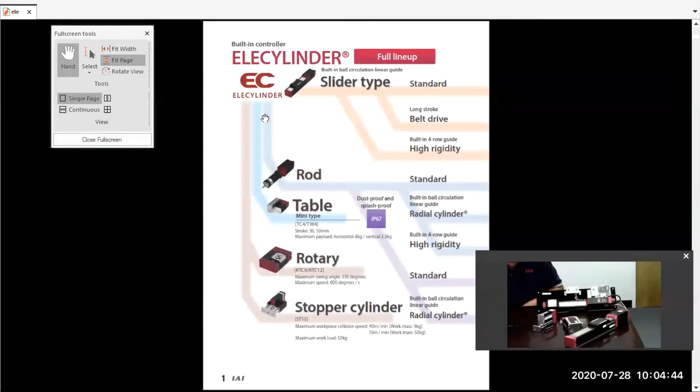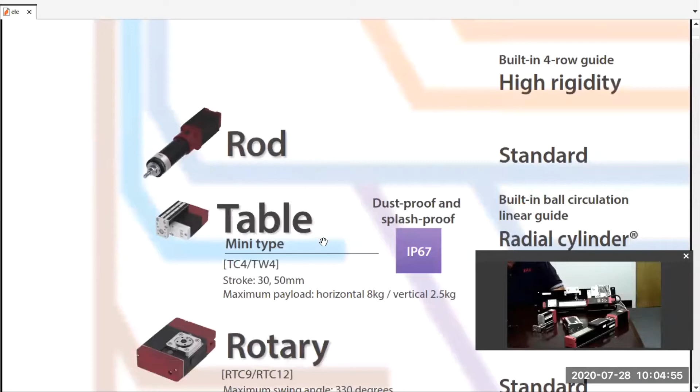We have a very broad product offering on the EleCylinder. We have the slider style, we have the rod style, we have the table mini type, and then of course we have a rotary actuator, and then we also have a stopper cylinder.

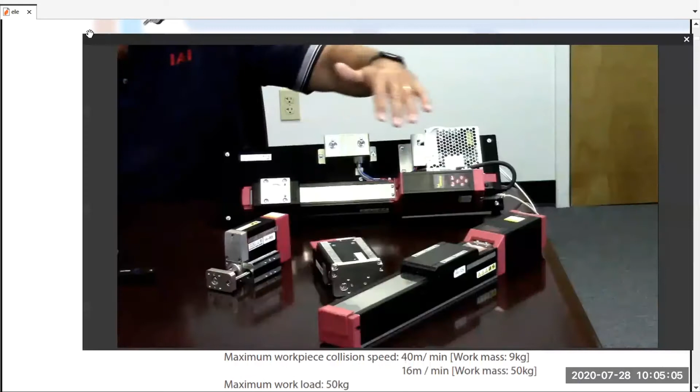You'll notice here on the table, the demo that I'm going to be working with is the slider style. Here's a couple of your stopper cylinders. Here's a table style with the rails, and then here's a larger slider style. We also have the rod style, which isn't represented here on the table.

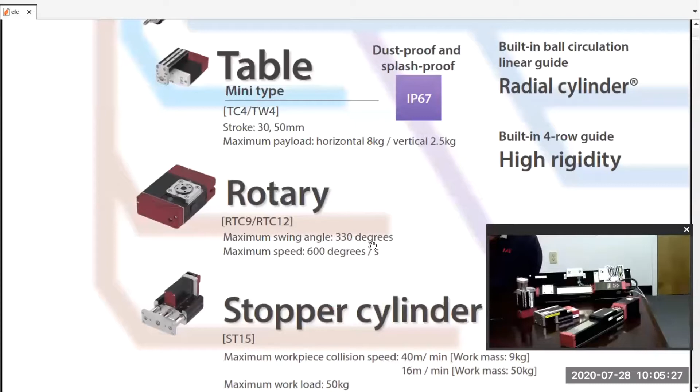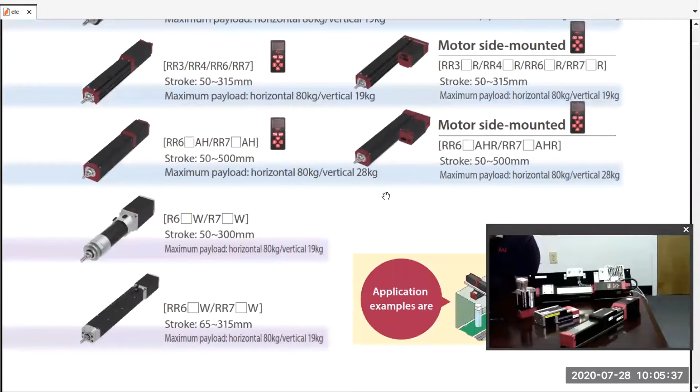This allows us, not only in the slider style but also in the rod style, to handle a side load or a radial load to the actuator. The actuators will come complete with the motor, the coupler, the ball screw, the slider. Everything is included, the controller, everything is included in the EleCylinder, even the cables.

So let's show you a little bit about the actuator here and explain a little bit about it. This demo here has, of course, the slider, the cable that comes with it. This incorporates the controller. And then what I have over here is a 24-volt power supply. These are all 24-volt devices. And then this is basically mimicking the output of our PLCs.

If I select one of the buttons, it'll retract it. If I select the other button, it'll extend it. So the simplicity of the EleCylinder is that, again, we're going after the pneumatic applications. Most pneumatic applications are extend to the end of stroke and retract back. So it's a two-position device, okay?

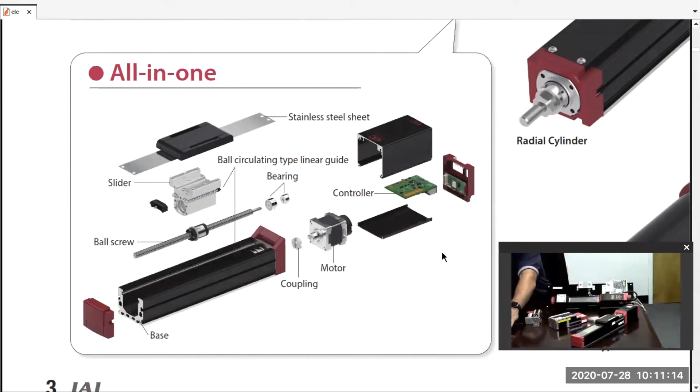With that said, let's go into it. I'm going to shrink my screen here a little bit and show you what my setup is on my EleCylinder. We have many different ways to set up the EleCylinder.

We're going to touch on the one that uses the RoboCylinder software. This is the exact same software that we've been using on the RoboCylinder for years, whether it's the rotaries or the linears, it's the exact same software. IAI is not in the business of selling software. Once you purchase the software for one application, you get it for life. So it's used across their whole realm.

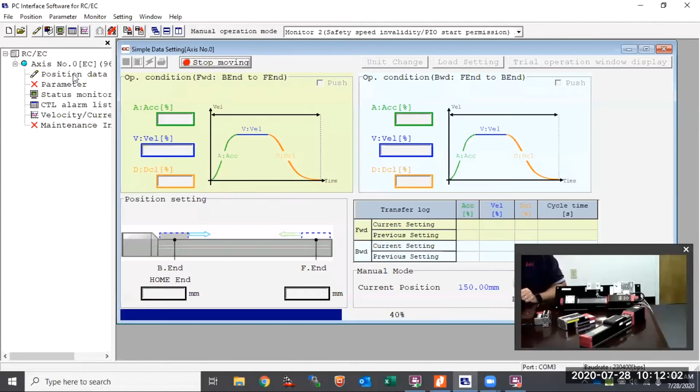So here you have your software, and I'm going to pull up our position data. If you're familiar with the RoboCylinder, you're going to look at this screen and say, geez, this is a little bit different. It is the same software, but when it's plugged into an EleCylinder, it's pulling up a slightly different application. And what we're seeing here is my extend stroke.

This is done with three variables here. I have my acceleration, I have my velocity, and I have my deceleration. With the acceleration in percentages, I have 100%, 36% of the velocity, and 100%. To change those units, if you wanted to work in different units, I click the unit change, and that takes me into G's, millimeters per second, and deceleration.

Now here we can modify these, and I'm going to come back to that. Over here we have our extend or our retract side. Exact same layout, but working on the retract stroke.

Down here, we have our position setting. This is really interesting. When you order a 12-inch stroke cylinder, unless you put an external stop, you're going to have 12 inches of stroke. On our EleCylinder, you can come in here and change this at the setup point and modify it.

This guy is a 150 millimeter stroke, and I'm going to change it so home is at 10 millimeters and extend is at 140 millimeters. Once we set that up, we click our transfer button. Oops, I have to go into teach mode so I can modify this. Once I hit my transfer button, we transfer that up. And now I'm going between 10 and 140.

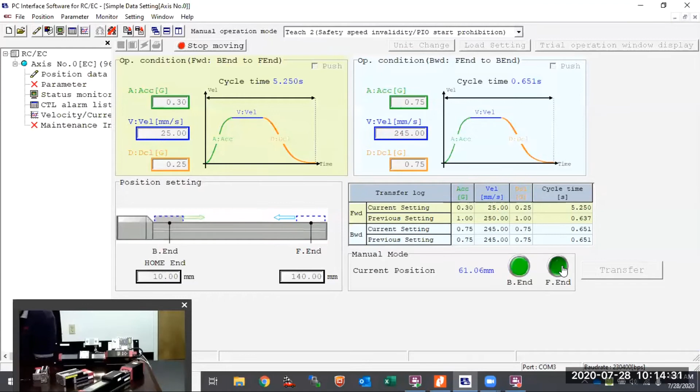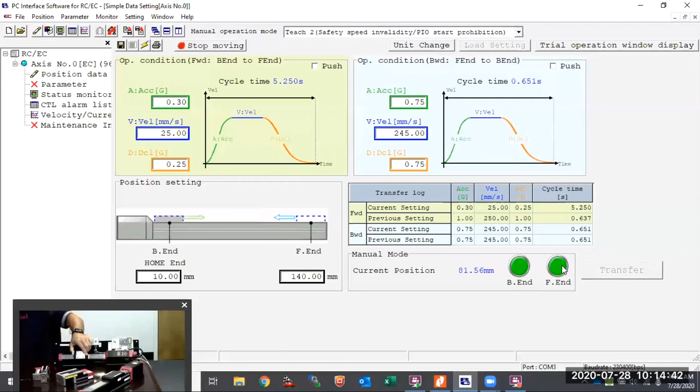If I let go of that button, just like if I dump my outputs on my solenoid for a pneumatic application, I'm going to stop right in mid-stroke. As you can see, we're holding full torque. I come back on that, and I continue on.

So you can see here that this is very simple in your layout. You're reading your position down here. You've got your buttons that are mimicking your solenoids, so you can test this out and make all the modifications you want.

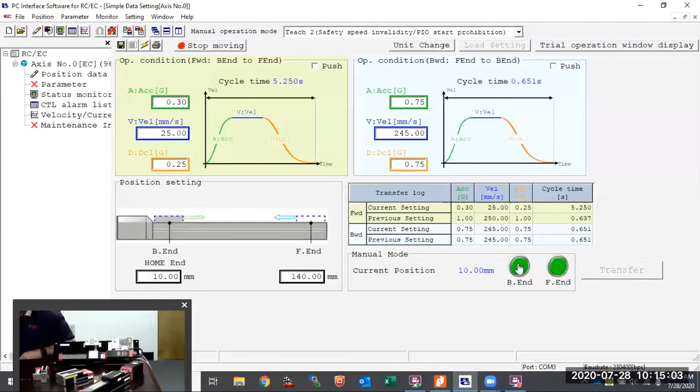Now, you can see that the software is very easy, and I mentioned we're just going to touch on them here very briefly, but there are a couple of other ways that you can program or set up, if you will, because that's certainly not programming.

This unit has actually a digital screen on it that allows you to adjust your locations, your speeds, your accelerations, all the things that I just adjusted on the software, we can do it on this screen. We can also outfit these to have Bluetooth and have an actual pendant that is set up very comparable to the software.

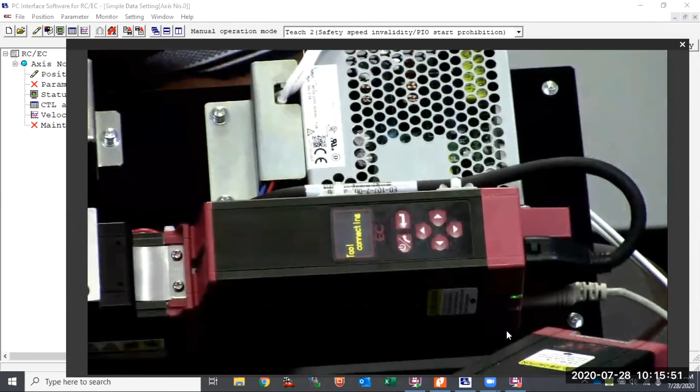And with that pendant, you can now go out and attach to it Bluetooth to multiple units on a machine and set up and change and modify the speed, the acceleration, and the stroke amount on each one by identifying which one on the Bluetooth pendant.

So basically what we've been able to show you here is a very broad line of linear actuators and rotary actuators that again are going after and mimicking that of a pneumatic application. We're doing it and allowing you to adjust your speeds, your accelerations, your strokes, and doing it in a very precise way with the electric actuators.

Just to give you a ballpark figure on your basic actuator, you can assume that you're going to be in about the $900 to $1,000 range on your actuator, and that includes the actuator, your controller, and all your cables. That's a very broad number, but when you compare and contrast that with the air cylinder, fittings, flow controls, tubing, cylinder, switches, your solenoid valve, and pressure regulator, we are right in that ballpark of a pneumatic application, giving you the precision of the e-stop, the control, acceleration, all the other things.

So that is the EleCylinder. It's not the EleCylinder in its entirety. We didn't show you the teach pendant, and we didn't show you a couple of other things, but it gives you a very good view and understanding of the EleCylinder.